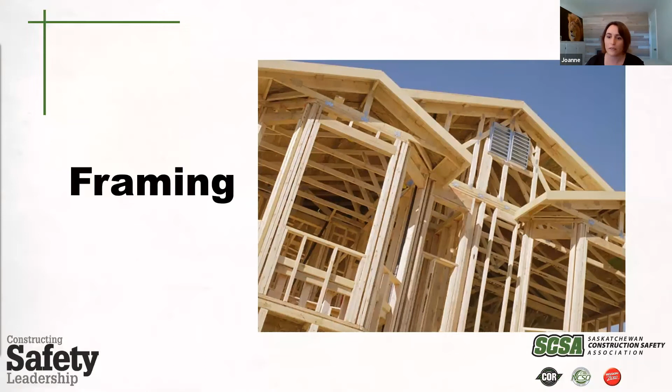So framing in the construction industry is known as light frame construction. It's a building technique based around structural members, studs, which provide stable frames to interior and exterior wall coverings. You also have your roof, which comprises horizontal ceiling joists and sloping rafters, which are also part of framing. You can also have manufactured prefabricated roof trusses as well.

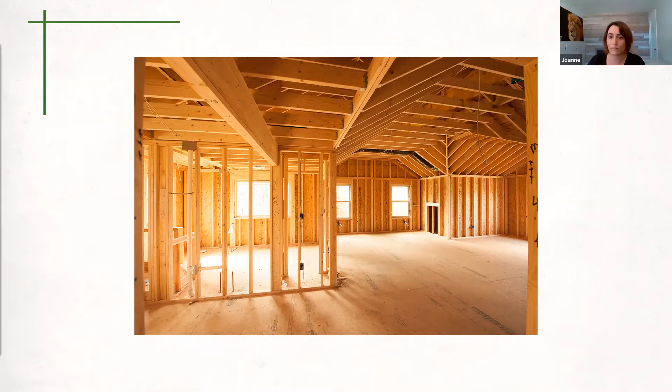I do also want to include our metal studs. They do also offer advantages in your framing. Metal studs provide disaster resistance, such as termites and mold damage, unlike wood studs. Wood also has several advantages over metal. Wood studs are less expensive, more available, and they are easier and safer to cut, maintain, and repair overall compared to metal studs. Neither one of these products is energy efficient or fire resistant, and both will require some extensive measures to create acoustically pleasing indoor environments.

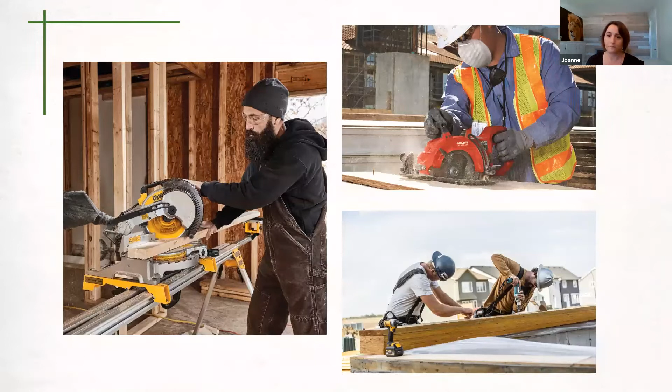So let's get into some of the tools that we're going to use for framing, and some of the hazards associated with them. Miter saws often result in severe cuts or amputations if there's improper training and use. Circular saws have hazards including projected particles, electrical shock, breakage of the disc, cuts and amputations, blows caused by objects, abrasions, overstrain, and noise.

So some controls you want to use for both of these: you want to inspect your saw completely, make sure the blades are sharp, and check your material for objects such as nails and screws. You want to make sure hands are kept at a safe distance from the blade during the cutting operation. You want to wear the proper PPE, secure your stock being cut to avoid movement, and allow the saw to reach full power before starting your cut.

As well with circular saws, it's important not to hold or force the retracting guard in the open position when cutting, and not to put your hand underneath the shoe of the saw either. Cut materials without overreaching. Keep proper footing and balance. And you also want to make sure that you do have the correct blade for either one of these.

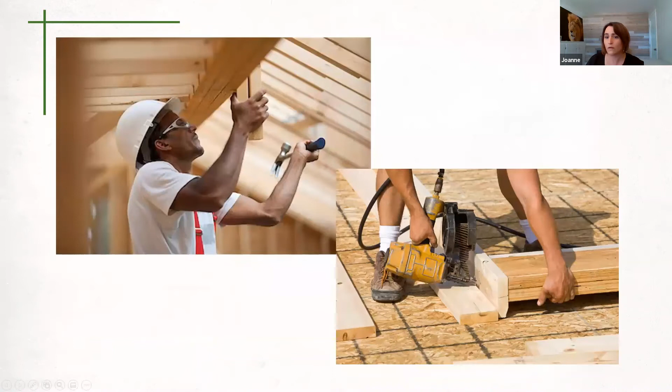Whether you're using a framing hammer or an air nailer, training is important and proper use. Injuries from the nail gun can lead to trips to the emergency room.

Don't assume that a nail will go where you intend. When it comes to the nail gun, it can glance off and slide and fly through unseen knots and miss a stud completely. Make sure that all co-workers are well out of the line of fire.

Bump firing is when you keep your trigger pulled for rapid fire of the nail by bouncing the gun on the safety tip along the surface. This can also lead to accidental shots. It does definitely speed things up, however it's a safer choice when using a nail gun to use one shot for every nail and not do rapid fire.

I have a couple more here. The nail gun is a hand tool where there's a tendency to focus completely on the firing hand and ignoring the other, and often this leads to accidentally shooting your passive hand. So you need to always be conscious of where you are placing that hand.

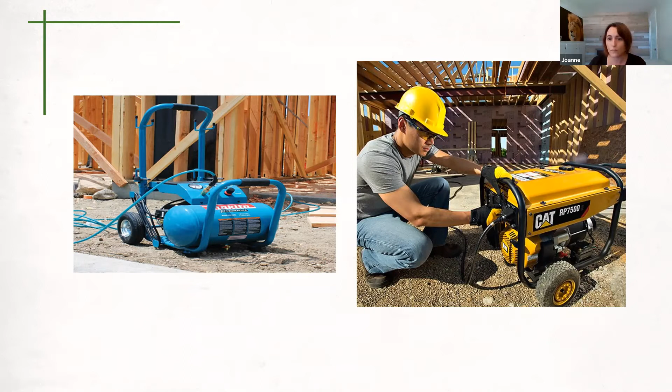Next, working at heights a little bit with ladders. No matter what you're using, whether ladders or aerial work platforms, you need the appropriate training. Make sure you're following proper setup and inspection of your ladders, and make sure everybody using the AWP has training and fall protection as well.

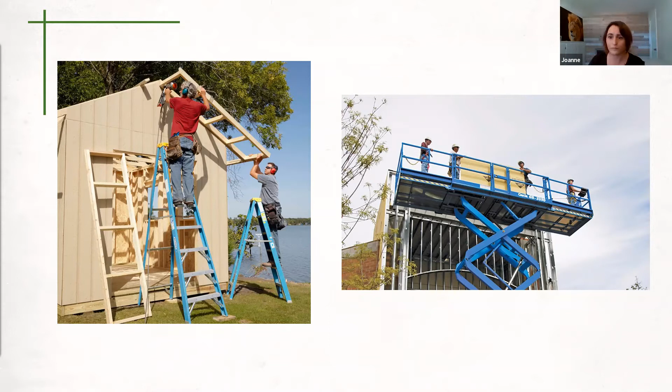Another hazard associated with framing is falling. A lot of people think of the leading edge when falling, whether it be a roof or an edge - they often remember that. So good fall protection or a guardrail system is going to be key.

Don't forget about your windows - when you're framing, they do not offer the proper guardrail height, so accidental falling out of those windows often occurs. And for holes in the floor, whether for stairs or something else, making sure you cover or put a guardrail around that hole is important.

Another injury common in framing is actually falling objects falling on you. It's very important to wear your hard hat. People are working at heights around you, and having items fall could also result in injury.

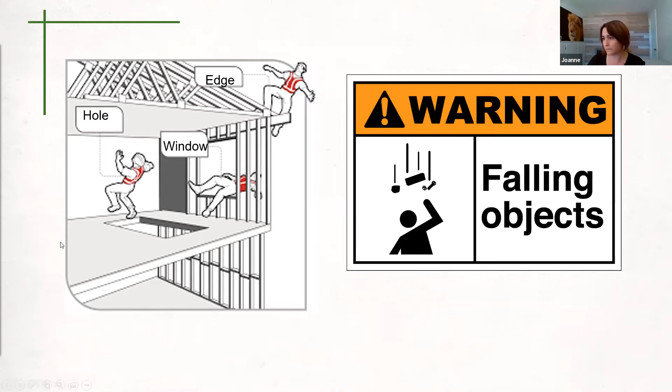Heavy lifts often occur in this one. Sometimes a crane comes in to place the walls, and oftentimes it's actually the crew that'll be lifting the walls. So you want to make sure you prepare your lift and have enough people to do it, mind ergonomic strain, and make sure you stretch ahead of time.

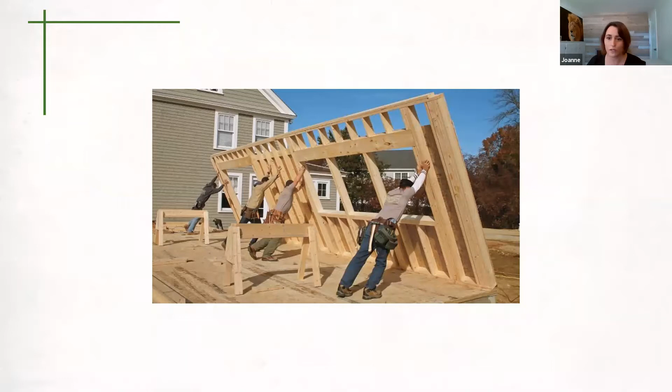I have a little bit more on ergonomics - work-related musculoskeletal disorder. The leading causes are gripping, nailing, lifting, working in awkward positions, applying force, repetitive motion, bending, working overhead, twisting, overreaching, squatting - basically everything you do in framing. So make sure you're taking breaks, incorporating better technology and tools, and taking care of yourself with stretches as well.

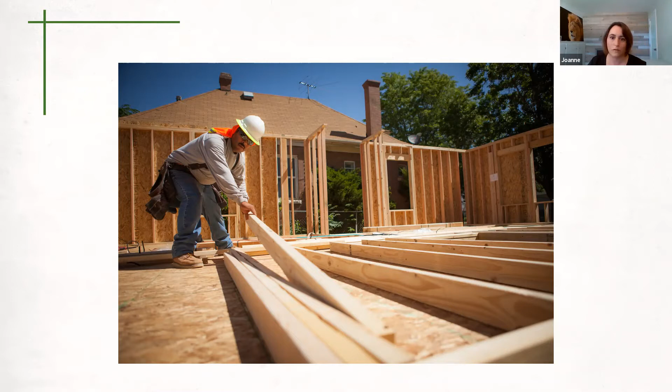A lot of times when framing, you'll be working at heights, especially in roof framing. You want to make sure you have proper training, fall protection, anchor points, access to the roof, and stability of the roof. Obviously you're framing it, so it may be unstable - there are some extra key factors to pay attention to.

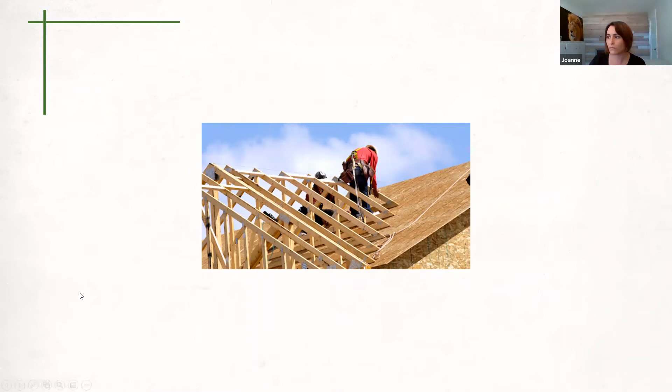Talking about roof framing and laying out your trusses, sometimes people may want to walk on top to lay them out, but there are other technologies and ways to do that. You can have a scaffold, or a system with a full work platform and guardrail, so you can work more freely, reducing that risk of falling.

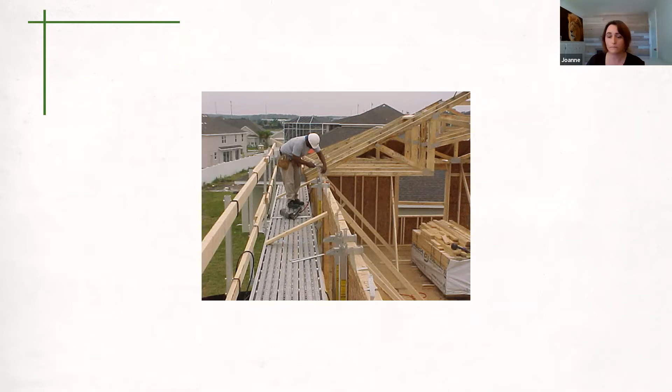High-vis vests are important, especially when you have power mobile equipment around you. Hand protection, and a harness, obviously, for working at heights. Foot protection is mandatory for construction sites as well.

Long pants, and then we also have hearing protection. This is also very important when it comes to framing. Don't forget about hearing protection. Whether you're using an air nailer or hammer, you're making noise all day long cutting material. It's going to be a noisy work site for an extended period of time, so make sure you have adequate hearing protection.

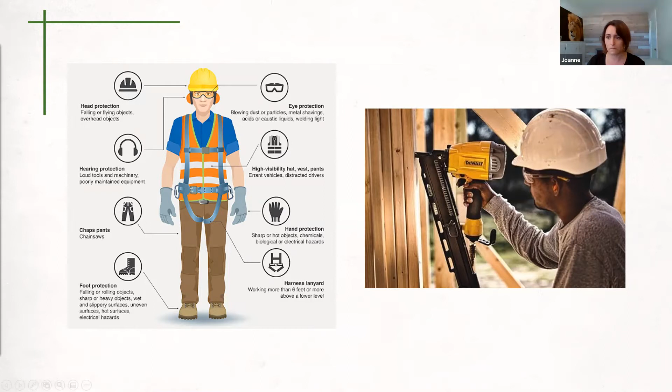Framing is dangerous work. The bulk of injuries involved in framing are struck-by objects, slips, trips, and falls. Most of them are actually falling to a lower level, or being caught in, compressed, or crushed. And they are preventable with the right measures.

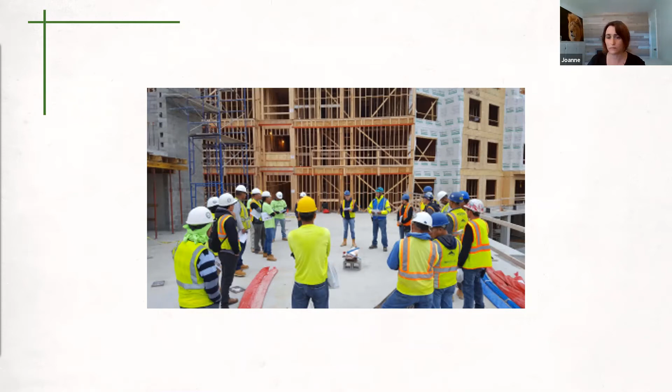So it's important to have proper planning, training, and supervision, making sure everybody stays safe. Okay, so that was a little bit of information on framing.

Let me just check. Okay, any comments on the presentation thus far?

No, sorry, my video for whatever reason just stopped, so I'm going to have to just go by voice here today. But no, that was a great presentation. It touched base on a lot of the things in framing that you're going to come across.

Whether it be falls, or tools involved—sound was a big one, I'm glad you touched on that. Hard hat and steel-toed boots are the requirements, and everyone knows about safety glasses, but that missing piece of the puzzle is, I'd venture to say in most of your pictures, even that guy starting the generator, you didn't see earplugs in.

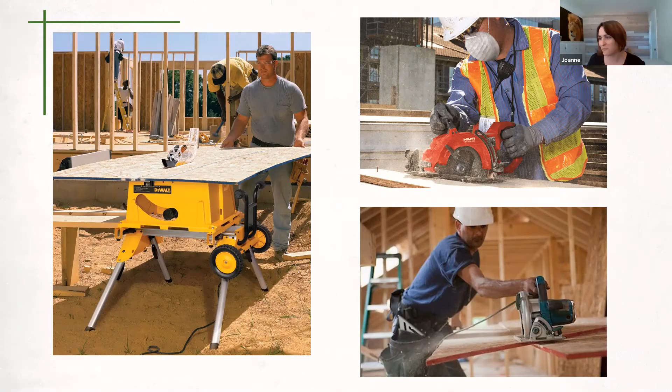So in this first one, I did discuss the tools. Now we have a couple scenarios of some circular saws being used, as well as table saws and the environment. Any of you have any thoughts or comments on these?

I'm going to guess that we're going to be able to touch on PPE in almost every picture, picking apart what they're wearing. Aside from the obvious, I look at that table saw picture, and what I saw is the potential tripping hazard he's got right beside him there, uneven ground. Table saws can be one of your most dangerous tools out there.

I'm glad to see there's a guard on there—I've seen way too many sites without a guard on the table saw. But that 4x8 you see protruding out, is there somebody helping him on the other side? When you're cutting those long sheets, at some point you're going to get to that mid-span point. Now you'll see people let go and come around to the other side, but that's not ideal—now you've got a potential kickback and twist.

Like I said, he's obstructed on both sides. So get help when required, for one thing, and make sure your walkways are cleared, and once you cut that piece, think about where you're putting it, that sort of thing.

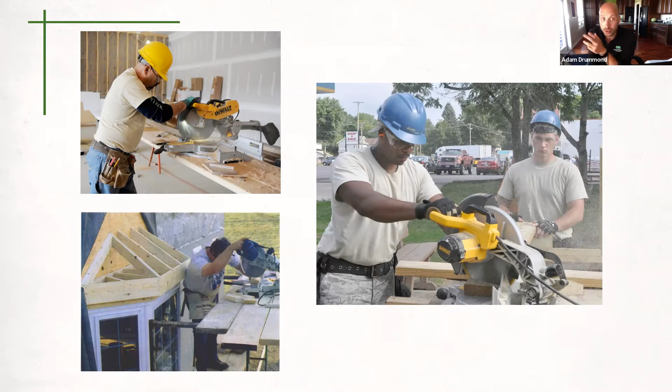If you're going to have a miter saw, what also goes great with it is one of those workbenches with the slide out arms - it's got wheels on it so you can move it around. A lot of them are built so the miter saw or chop saw can be mounted permanently, and you move it around like a dolly and set it up. Go buy one of those - you'll thank yourself later when your back isn't bent up, or you don't need another person holding the end, because you extend that arm out and have an engineered solution to help you do your job better, safer, and with better quality because you're comfortable doing it. That's my tidbit.

One thing you mentioned is that when you're setting up a miter saw, you're expecting that saw is going to be there all day cutting. Things that get missed is what are you doing with all your cut off pieces. So you want to think about your tripping hazards, how you're setting up. If you're going to be there for a while, all those cutoffs need a place to go. You're going to want to establish your whole surroundings. I've worked on job sites, especially larger projects, where your chop saw guy is literally there all day - you give him a chop saw list, he'll call somebody when he wants another lift put beside him, but he's there all day. So make sure they don't actually have fatigue from that pattern.

You want to make sure it's kind of like how we're told when sitting in front of a computer screen to get up and stretch. For them, it's actually refocusing on something else so you can get back to the task at hand. Because being cut with the saw if you're not paying attention, or somebody's talking to you, or you do stuff too repetitively, your brain can not be thinking about the task at hand anymore. So those are a couple of things I noticed.

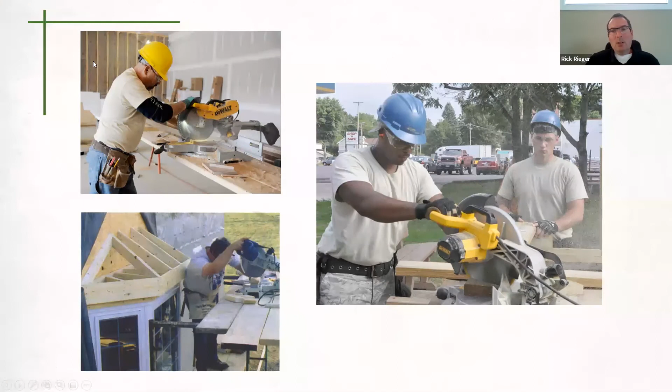Okay, great discussion. Well, with that one too, it looks like it may have been even in a park, somewhere open to the public. So I don't know if they have their area secured or contained, or if there's people walking around. We need protection of the public as well - because it almost looked like there was a park bench there.

Okay, so now we have this one here. It's got some ladders.

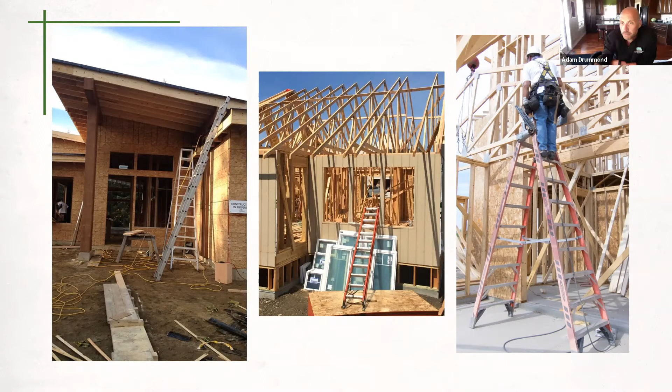I guess I can butt in a little bit here. So Joanne mentioned about housekeeping. Let's be honest, this is disgusting. We can keep it way better on site than this. We've all tripped on stuff, we just try not to. And the best way not to is by getting all that stuff off the ground and putting it into the right place.

Here's something I learned growing up: I became more and more of a clean freak kind of person. And the jobs I worked at, the employers always liked me because I always cleaned up. Not because I cleaned up, but because nobody else liked to, and I didn't argue about it. I just did it because I have a little bit of OCD maybe, I like to keep things clean. But one of the things is it's so appreciated because people aren't stumbling over things. So please be that person that takes the responsibility to just start cleaning, because somebody needs to.

This kind of stuff can't happen on site.

We always keep mentioning slips and trips when it comes to housekeeping, but I agree with you, Adam, a clean work site actually makes everybody more efficient. Not only do you have less things to trip about, but every framer's got two long cords with them, right? Their air hose and their electrical cord. And they're always like a foot short because it's wrapped around something. So generally they don't walk back and unhook it, they just try to give it a yank. Whatever it's hooked around could potentially fall too. So the better housekeeping you've got, the less chance that your hoses and cords are going to be wrapped around something, and less chance that they'll just do the quick fix of yanking on it.

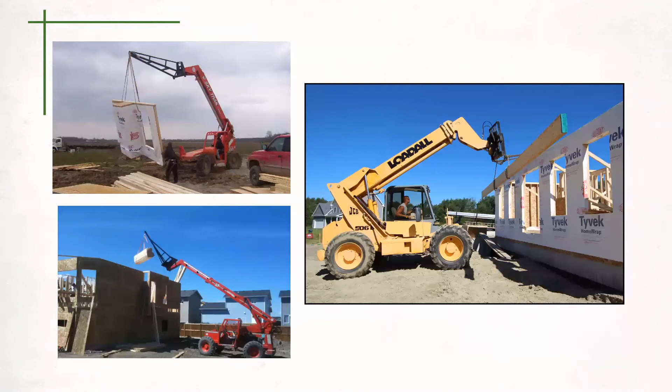Yeah, for sure. Every framer's dream is to have one of these on site. When I started in the business, you start as the guy throwing stuff up top. Now these are a lot more common, even if companies share them in a neighborhood or whatever, but they make work a lot easier if used properly. You do have to make sure the guy driving it is competent, trained and competent. This isn't one of those just show them how to do it and watch them do it once sort of scenarios. They need actual classroom training to be behind the wheel.

More often than not, you're not going to be driving in perfect flat conditions. You get a little bit of rain, now you're sinking in the mud, you got issues there. Even when that dries up, now you got ruts. Just really being careful in regards to that.

What I do like about some of these pictures, like that one with the Loadall, the yellow one there, he's chained right off. He's connected to 2 points, so it's balanced really well. There's no need as much for a spotter or a tagline, because he's secured in 2 spots on the machine. You're not going to twist, you're not going to spin. He can just get into place and put that up.

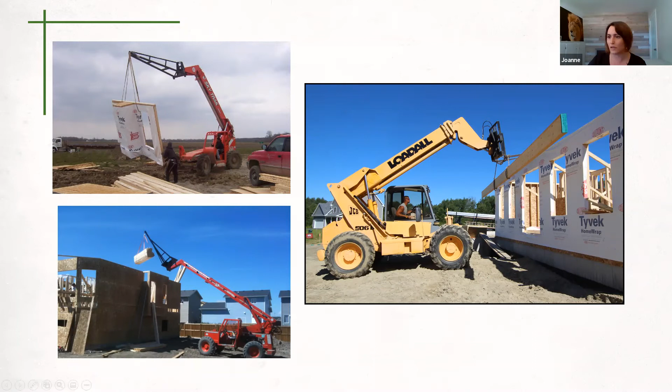The next one is something we talk about a fair bit here at the SCSA, and that is holes in the floor, or holes that you can fall into. In the next slide I actually have some controls we can put in place, but let's go over general housekeeping and concerns about these.

In my classes, one of the things I like to do is give out fun facts. One of the fun facts is open holes, how to cover them, and what is required by legislation. There's a lot of people out there that don't know exactly what is required when it comes to coverings of a hole. A lot of people will say it's 3/4 inch plywood that you need to use, and that could be it, but that's not actually the answer.

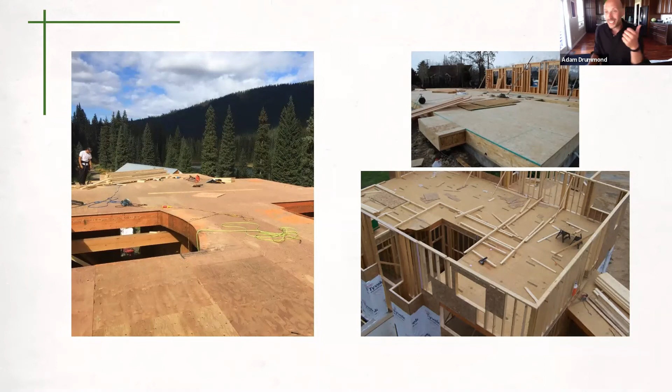When you go into the legislation and start looking at openings in floors, section 124 of the regulations states that an employer, contractor, or owner shall ensure that any opening or hole in a floor, roof, or other work surface into which a worker could step or fall is covered with a securely installed covering capable of supporting a load of 360 kilograms per square meter, which is 793 pounds per square meter. It doesn't tell you what type of material or the thickness, so it doesn't matter what type or thickness in the legislation.

So if you're going to say it's 3/4 inch plywood, that could be it, that might not be it. You have to understand that it's a weight, 793 pounds per square meter that you need to be able to support when you use a covering. So that's one of the things I talk about.

That's a great point, Adam. You could look at virtually every hole in the picture here, and I think we can all agree that putting a 3/4 inch piece of plywood over that is not going to be enough. As an experienced framer, I found these open holes were way more hazardous than your edge. Everybody thinks about the edge, your peripheral vision has that, but these, your brain's not ready for it. You're working on a floor and there's an open hole behind you, and these get missed more often than they should. That railing should go up as soon as possible, or sheeting like you said, Adam.

You can build a temporary floor below it and make that 3/4 sheeting good, whatever it takes, but those are definitely bad areas. And then even in that top corner one, you look at those windows there, and that wouldn't be high enough railing either to go through there, and that door opening. So you have to be aware of those too.

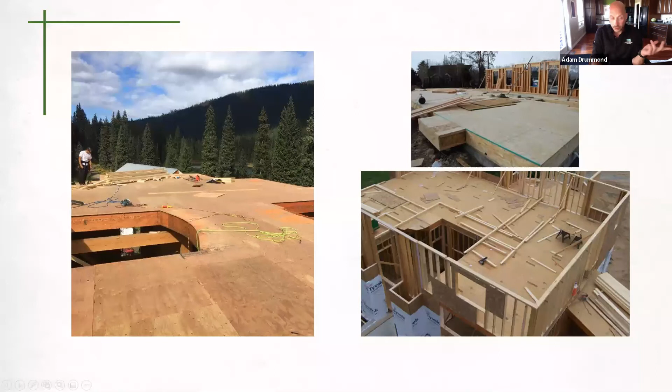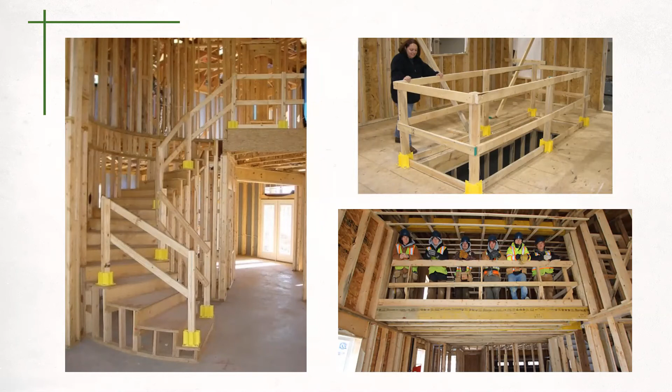The picture on the left, I'm looking at a bunch of trees in the forest. I'm going to say that those people are working all by themselves. Remember, if you're working by yourself in a scenario like that, you've got to cover all your bases, put up your railings, cover the holes, do whatever you need to do so you're not going to get hurt. That's all I wanted to say.

Just one quick thing with what you said, Adam. Working by yourself like that should actually give you more reason to be safe, because you're a lot farther from help. You might say, oh, nobody's going to catch me doing this. Well, nobody's going to be able to rescue you either in a timely fashion when you're not close to resources or out there working on your own.

Yeah, and what I noticed with one of the photos on the last slide, and even these ones here, and this is quite common what we come across, is whether it be interior walls or exterior with the wall studs - you'll have your vertical wall studs, but there's nothing horizontal protecting people from falling outside. Sometimes not as big of a deal when you have 16-inch spacing, but if you have 2 foot on center spacing, you see that quite often. So people may think that with the wall studs, they have that protecting them from falling. But if you were to lean against or fall through those, that's not offering you a lot of protection. You see that with the photos here.

Yeah, on the bottom right hand there, you see it with the left side, and there was on that photo on the previous slide where it was on a 2-story, and it was exterior walls that was partially sheeted that didn't have that throughout.

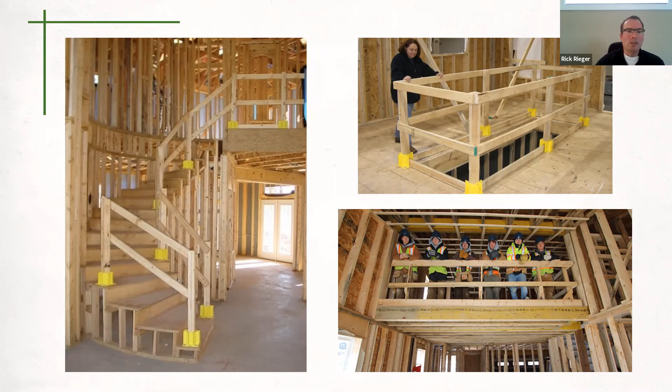It's just a quick up and down. Again, accidents or incidents don't discriminate with that. So make sure when you're doing things that you're not cutting corners, that you're doing it according to legislation, so that you don't get hurt or have incidents or fall or anything like that. There's just so many hazards when it comes to these situations, especially when it comes to framing.

One more thing with the railing too, it doesn't end at the framing stage. When the framers are there building the building, they put the railing up. That railing can get, like you said Rick, somebody needs to move something to get it in, or take something up the stairs, or lifting a set of stairs. It'll get taken down and put back up with the same nails. They'll pop the nails off with their hammer, bend them back up, and put them back, and your railing's actually getting a little weaker and weaker every time you do that.

So you see them up there and your crew didn't put them up - you're the next trade in there, I would definitely invite that to be part of your hazard assessment when you're starting your workday, to ensure that those railings were properly done, because nobody takes responsibility for them. Every trade comes in there and says, well, I told so-and-so to do it, or they were up yesterday, somebody else took them down. Well, the fact of the matter is you and your crew are in there - you're responsible for the railing for you and your crew. It doesn't matter what somebody's done in the past. You can point fingers all you want, but if you're in that building and utilizing those areas, you're as responsible for that railing as anybody else was before you.

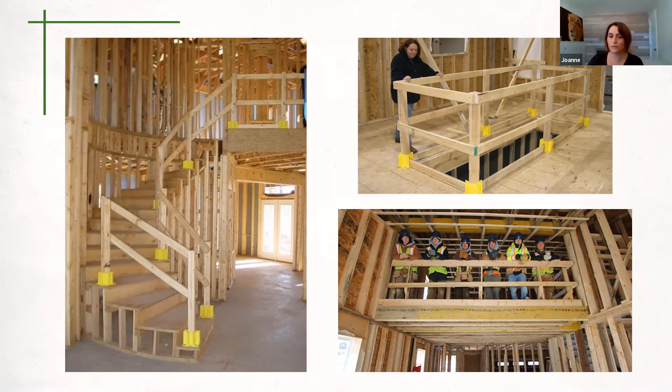I am just going to leave it at this: do not just buy it and pretend to know what you're doing. Go and get trained on how to use this tool. It can be dangerous if it's misused - very dangerous, and people have gotten hurt. So please make sure you know what you're doing with this one.

Yeah, I agree with you, Adam. This one gets overlooked in the framing aspect of things, because it gets used on the first floor, or not quite as frequently as the rest of the framing tools, but it's its own category in the legislation. It talks about the storage of your charges, the proper training, and not just how to use it, but how to clean it. It's definitely a tool that is meant to be used properly.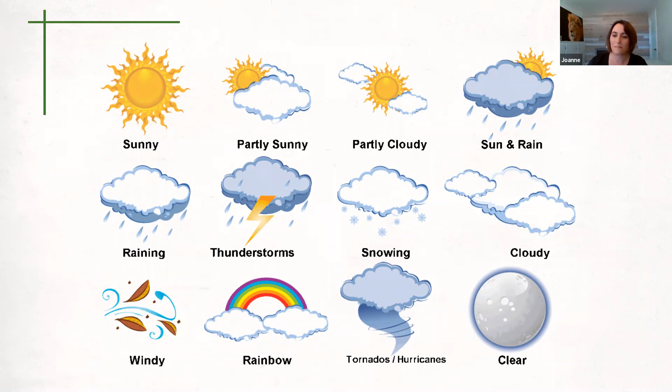How important is weather when it comes to framing? We could actually touch base on its own topic on every one of these, because you go from the sunny up in the top corner, and there's the complaints about it being too hot for my hard hat, nothing's over top, right? And then you're talking about sunburn and heat stroke, that sort of stuff. Even to the partly sunny and partly cloudy, where you feel like all the right conditions are there, so you're not thinking about the same things that you would on those hot sunny days of hydration and stuff like that.

But when I do hazard assessments prior to a job, weather was one of my check marks on there, and it was just simply written as weather. So we would talk about what the weather was supposed to be for that day and what it was right now, because you got different hazards associated with different weather.

We talked about the powered mobile equipment earlier, when it's raining and you're trying to drive it in the mud, or if you've ever used the saw when it's just drizzling a little bit - not so rainy that the boss will let you go home, but enough to gum up your saw. So you're cutting something, that sawdust gets caught in your guard, you go to push it. Even though you checked it that morning and that guard worked just fine during your pre-use inspection, now all of a sudden because it's drizzling, you're going to want to check your guard more often and clean it - unplug it and make sure that it's not gummed up. So yeah, weather is definitely a huge consideration.

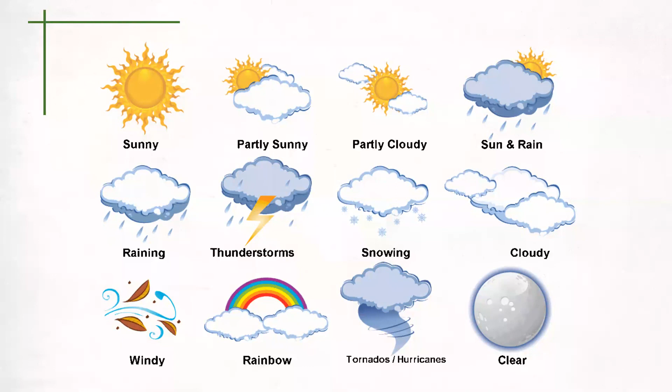Okay, here the next picture actually has a little bit of snow. So this can cover up some hazards that you have. It creates very slippery surfaces. So a good practice is, if you come in the next day and it snowed a little bit overnight, you would sweep all that up and clean up your work area completely. I think that's huge.

And that actually goes right back to the housekeeping that Adam was mentioning earlier. You keep a good housekeeping, now all of a sudden all those little pieces of wood aren't hidden under the snow. It was definitely a common thing - you're asked to shovel off everything real quick before it melts and everything starts dripping. Well, you're not shoveling chunks of wood because you dealt with it the night before. This snowfall happened overnight, you can tell, and then people walked on it before it started. But they started with a clean floor, and that is quite advantageous to the weather conditions, if you can think about that too.

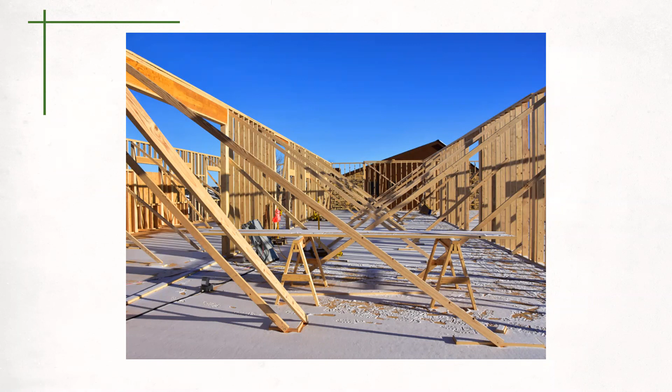We're not really thinking too much about this, considering the day it is outside now, but this does come up pretty quick. And even with this, we don't know what the temperature is - it looks like it's sunny, it may be a warmer morning. But when it gets to those extreme temperatures, you have even equipment like compressors that may not kick in because they're too stiff - the oil is too stiff in the compressors. And even just touching that metal equipment like air nailers, you may have some gloves on, but it's often difficult to do what you can with the types of gloves you're using. You can dress properly for the job, but it's typically the hands and the toes that seem to get cold. You can layer up and do all those sorts of things, but those are things to take into account as well when the weather gets that extreme.

I just want to make one mention. I was building a second floor addition onto a house, and it was cold out. It was so cold that we had to go in and out with the air nailer because it could only last 10 or 15 minutes outside before it froze up, and then we'd have to go inside. But the tool wasn't the problem. My eyes froze shut because of the moisture from my scarf breathing out. I had water on my eyelashes, and I blinked once, and they didn't open again. I went to my buddy and said, that's it.

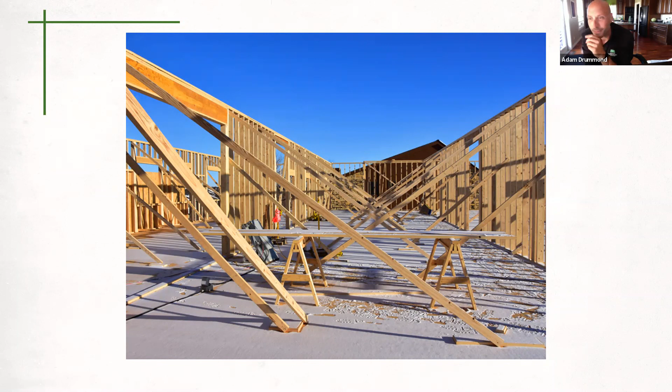We're calling it. Once your eyes start to freeze, you should stop working. Now, it wasn't a big deal, it was only a little bit of ice on my eyelashes, but the point is, tools and people do get cold, and we don't work so well in the cold. So we should take those breaks, even call it a day if it's too cold. Okay? Just remember.

Yes, definitely. That's it. I haven't heard that story from you before. So yes, you want to make sure you adapt to any of your weather conditions and make sure you follow the appropriate procedures for those.

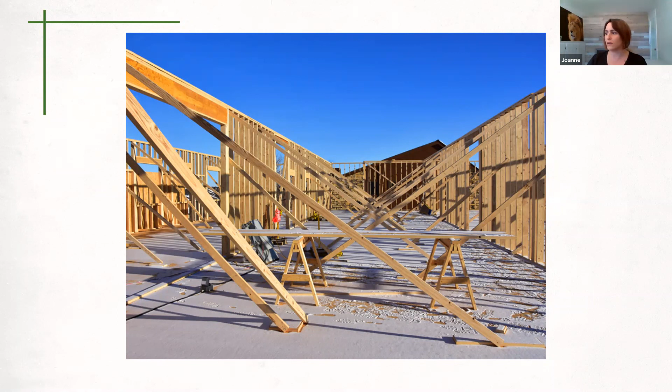I think we have time for maybe one more slide, maybe two, we'll see. The next one here does discuss when we are bringing in cranes to help us with our framing application. We do have an additional risk that comes into play as well.

What's your feedback on these pictures here? I'm just going to say, make sure that whoever's operating the machine and whoever's the tag person is competent, somebody with training, knowledge, and experience to be able to do this. So just call up your buddies and say, hey, let's rent a crane, let's start moving stuff, it'll be neat.

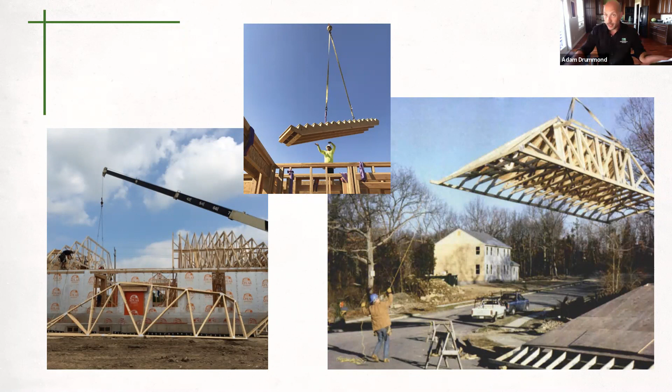No, no, no, no. Training is, well, heck, legislation. You better follow legislation. There is a bit of information on these machines. Be careful. Make sure you know your surroundings, and make sure you have a meeting before you start moving stuff around to find out how you're going to move it, where you're going to move it, who's going to be involved, how you're going to communicate, where is everybody else going to be while we're doing this lift. Make sure that communication is the biggest thing when it comes to this, okay?

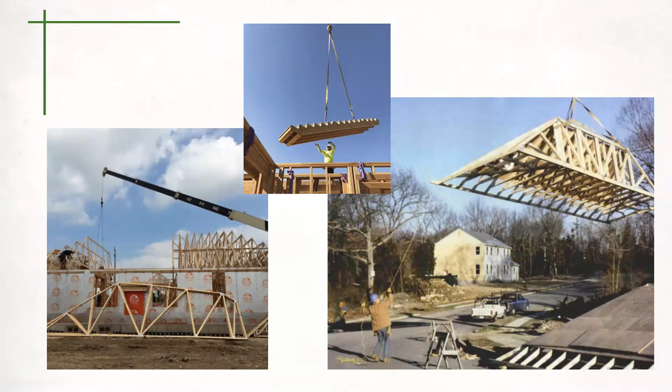I 100% agree with you, Adam. The pre-meeting, before the crane gets there, you make sure everything is 100% prepped. It's quite a stressful day, especially if you're lifting a bunch of things. From the supervisor's point of view, you've got extra hazards on site. You're paying for a crane that's costing as much as your workers, so every second counts, right? So it's going to be more stressful that day. If the supervisor can talk to everybody before things get there about what the actual goal is, you're not getting stressed out from not everybody being on the same page.

The workers shouldn't be below a load, no matter how light that load is. That worker that was on top reaching up for that set of stairs, no, there's never an excuse for that. You're on a construction site with 2x4s around, you've got tag lines, you use an extension cord, whatever, you never need to be below a load. But if you have those pre-meetings, like an emergency meeting, all that takes care of itself. The stress is gone, everybody knows what they're doing, and it can be a fun crane day.

Thank you for your input.